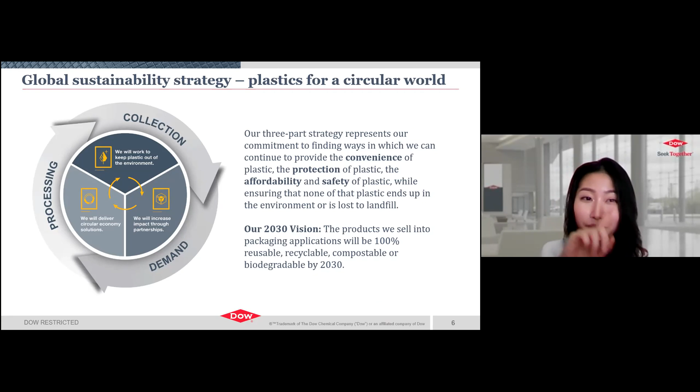our third phase of sustainability targets, we have announced our 2030 vision. The products we sell into packaging applications will be 100% reusable, recyclable, compostable, or biodegradable by 2030. This may sound familiar to some of you, as similar to what many brand owners have already pledged.

Led by the Ellen MacArthur Foundation in collaboration with the UN Environment Program, the global commitment has united more than 500 organizations behind a common vision of a circular economy for plastics. Driven by the goal of tackling plastic pollution at its source, companies representing 20% of all plastic packaging produced globally have committed to ambitious 2025 targets to help realize that common vision.

This global commitment to increase recycled content in their packaging to an average of 22% by 2025 amounts to a demand of 5 million tons of recycled plastics. In order to satisfy this demand for PCR, Dow has been investing heavily in not just R&D, but also in our assets to allow for this pivot to green plastics.

Unpacking the commitment from the brand owners, there are three key components to the pledge that need to be fulfilled by 2025. The first is the inclusion of PCR in the packaging. The second is enabling the new packaging to be recyclable. And the third is non-fossil fuel-based plastics for the new packaging.

Dow is delivering solutions to fulfill the recycle component with our 25% and above PCR in applications like collation shrink film and other protective packaging. With our design for recyclability category of solutions, like monomaterial PE pouches, we are fulfilling the recyclable component of the pledge. Lastly, to reduce our dependence on fossil fuel and move to renewable materials, we have introduced our 100% bio-based resin made from non-food competing sources.

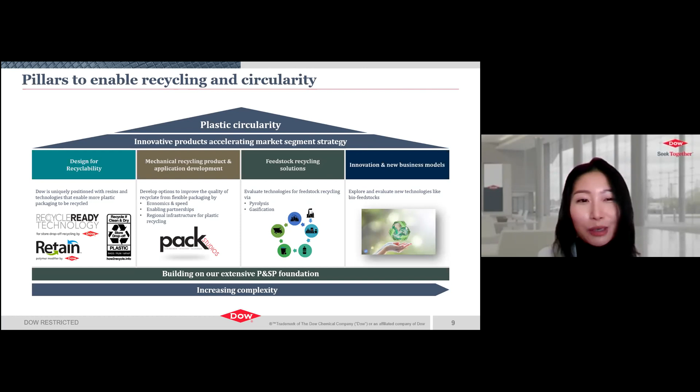In the pillar of mechanical recycling, Dow has been working with the whole value chain, from recyclers, equipment manufacturers, brand owners, converters, retailers, for product and application development, to ensure that our PCR not only fulfills the performance requirements of the brand owners, but is on par with virgin resins, to enable higher loading of PCR in all of the key applications we have targeted.

Now, I shall pass the time on to Daniel, who will take you through the details of our PCR solution.

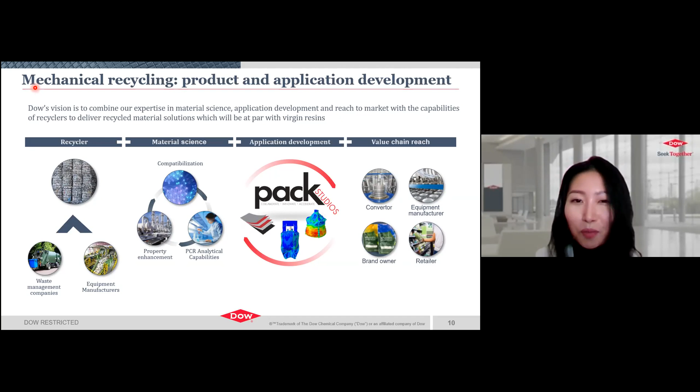Pack Studio is a place where Dow customers' innovative ideas or packaging needs get addressed through collaborations. Dow customers value the lab capabilities and also the expertise that help them solve packaging problems and develop better solutions.

The resin technologies from Dow suitable for mechanical recycling can be divided into 3 types. The high performance resins are the enhancers to boost the properties, compatibilizers to harmonize different polymers, and impact modifiers to increase the impact as the name suggests. All 3 can actually be used with post-industrial waste as well as post-consumer waste.

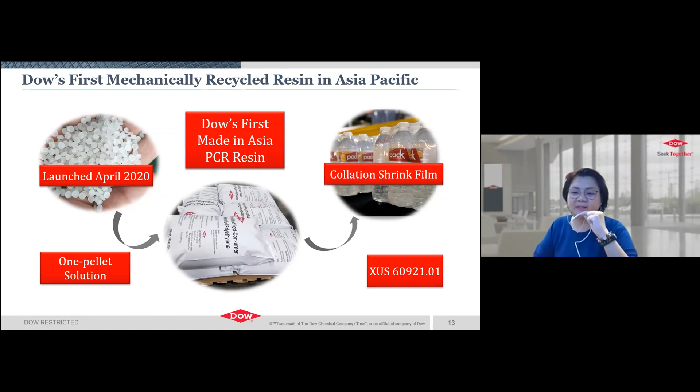So in April 2020, we launched the first made-in-Asia PCR resin into the market, named XUS 60921.01. It's a one-pellet solution, containing 40% PCR, targeting collation shrink application. The launch made headlines on main social media and also appeared in various industry-leading magazines. In November 2020, it won a Sustainability Award in China.

Dow's PCR resin is a formulated one-pellet resin with 40% PCR content, made with post-consumer waste collected within Asia and manufactured in China. The resin is designed to be a direct drop-in for the majority of collation shrink film in the market without modification of the current film structure. Depending on the film layer ratio, the PCR resin can deliver between 13 to 24% PCR. Since its launch in Asia, we have received strong interest from brand owners.

The main reason collation shrink is chosen as the first target application for our PCR resin is the market needs. Driven by modern lifestyle and also the recent pandemic, consumers are buying groceries online, and beverages are one of the most frequently ordered and delivered items. Despite Asia being the fastest growing region for e-commerce, the infrastructure makes it challenging for goods to move across intact. The collation shrink film holding the beverages together serves more than providing convenience, but is an important protection layer against physical abuse.

In recent years, consumers are paying more attention to sustainability. When consumers discard the collation shrink film, the waste itself has a visual impact on consumers, and thus a call for greener packaging.

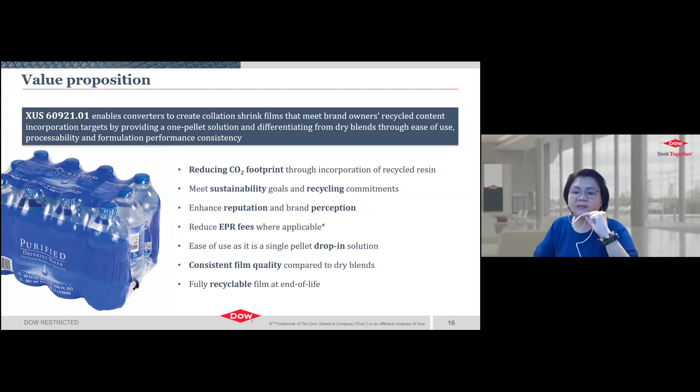Here's a recap of the benefits of Dow's formulated PCR resin. The PCR resin keeps waste away from landfill, oceans, and the environment through mechanical recycling. Technology advancement today allows us to produce consistent quality and high performance PCR resin, which in turn reduces the dependency on virgin plastics from fossil fuels. The PCR resin delivers lower carbon footprints, energy savings, and socioeconomic benefits in the value chain.

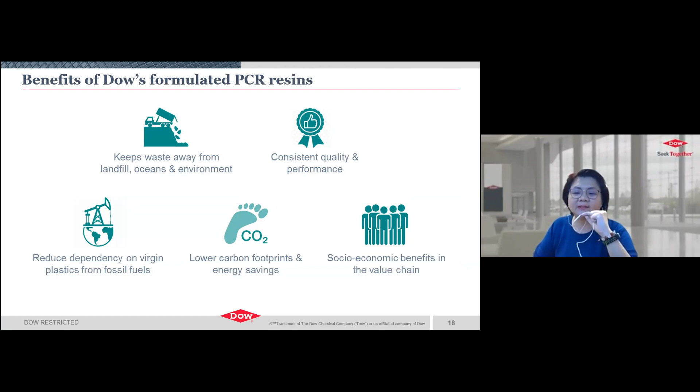Up next, we have a customer testimony from Thai Packaging, one of the leaders in protective packaging in Thailand, to share their experience of working with Dow on our PCR solution and how the market has responded to their sustainable collation shrink film.

Are you okay? Are you playing a video for us or no? Yes. Okay, sorry, okay. You can hear that, right?

Hello everyone, please allow me to introduce myself. My name is Thanadet Rabgopchai, or you can call me Trong. I am the Assistant Managing Director of Thai Packaging Manufacturer. I'm more than happy to be your interviewing guest today.

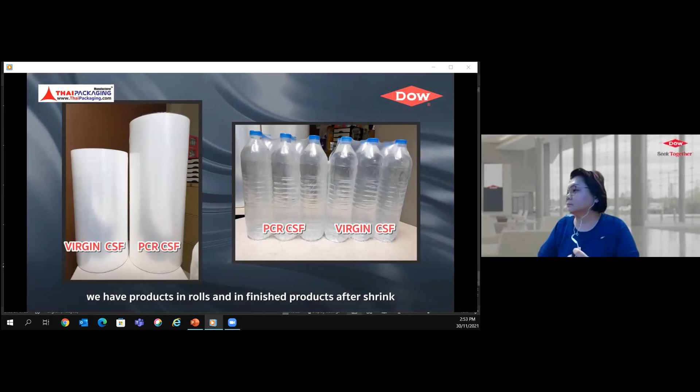Here are some examples of PCR collation shrink film that we are currently supplying to our customers. In front of you right now, we have product in rolls and in finished products after shrink. What you can see is that we can develop the PCR resin into film which has the same physical properties, just like using virgin resins.

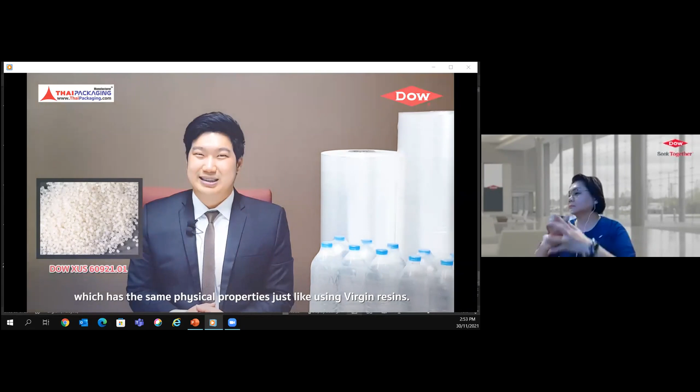Our sustainability goal is to be part of Thai communities, providing cutting-edge innovation for modern living flexible packaging, with our concept of 3 SAW 1 RAW strategies. The first SAW, develop quality products and services together with innovation alongside our customers. The second SAW, dedicate and share passion with our stakeholders, letting them be part of our family, Thai Packaging Family, Happy and Smart. The third SAW, deliver the IPOS standardized system to our supply chain to reduce mistakes in every process from beginning to end.

And the last, RAW, environment comes first. As a packaging producer, we never stop developing environmentally friendly products, and starting the circular economy in Thailand is our ultimate goal.

Dow Chemical and Thai Packaging have been good partners for a while. We share the same chemistry of business purpose, talking on the same page, driving innovation of packaging, pushing forward the circular economy. Dow is well known and has a high standard of profession, capable and more than enough to supply our needs.

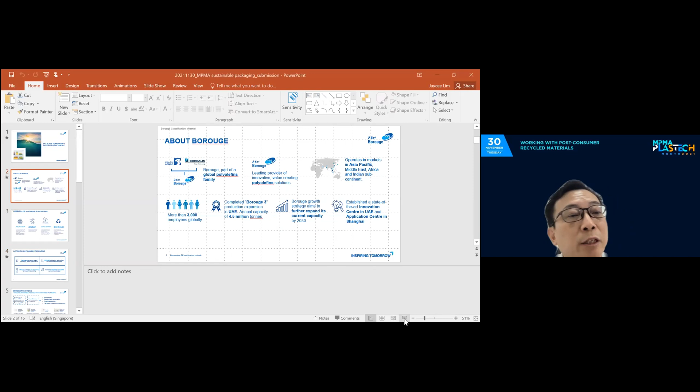So JC, you may have the floor. Hi, thank you for the introduction, Mr. Chase. So yes, I'm here to show and share with you how Borouge enables tomorrow's packaging solutions. But before I do that, I will first give a quick introduction to Borouge for those of you that's not familiar with us.

So Borouge, we are a leading provider of innovative value-creating PP and PE solutions across various markets in Asia Pacific, in China, Southeast Asia, ANZ, Middle East, Africa, and the Indian subcontinent. We are part of a global polyolefins family and are owned by the Abu Dhabi National Oil Company and Borealis, which is headquartered in Vienna.

We have the world's largest integrated polyolefin complexes, and we have the ambition to further expand our current capacity by 2030. We have more than 3,000 employees globally. And to support this growth, we have established a state-of-the-art innovation center and packaging center of excellence in the UAE, and also an application center in Shanghai.

Today's webinar focuses on recycling and the recycling solutions that are available in the value chain to support and drive recyclability. What I'm sharing today will also touch on those solutions. But before I get down to that, I would first like to take a holistic view on packaging sustainability. And from that angle, we see sustainability in packaging as a combination of the following four main elements.

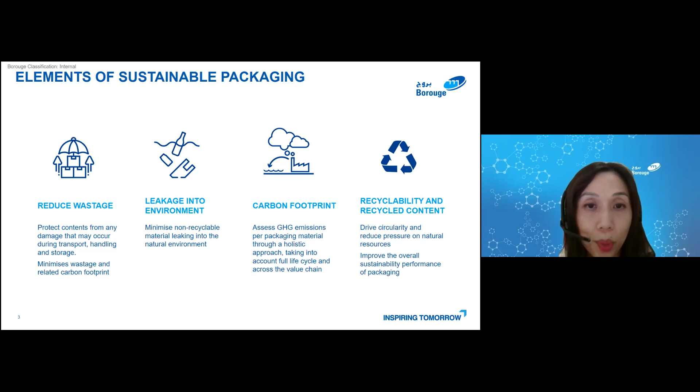With this understanding of packaging sustainability, I will next share what actions we take to drive sustainable packaging solutions.

First, to provide solutions designed for reusable applications, hence reducing unnecessary use of packaging. We also enable our customers and value chain partners to achieve lightweighting and down gauging, using packaging at an optimal level. Our solutions also drive efficient packaging by increasing productivity, driving energy savings, and reducing transportation footprint. We also promote solutions and concepts that enable fully recyclable package designs for greater recyclability, and we drive circularity, providing customers with solutions that allow increased renewable and recycled content in packaging.

Now we'll look at the ways our technologies and products enable us to act on these elements.

First, we look at how material innovation can help achieve higher efficiency and sustainability during production for rigid packaging. At Borouge, we make this happen through a combination of Borstar PP polymerization and Borstar Nucleation Technology, or BNT, which allows the product to have increased stiffness without negatively affecting impact, enabling lower wall thickness and down gauging of the end product. We also allow for the reduction of energy consumption through the possibility of reducing the extruder temperature.

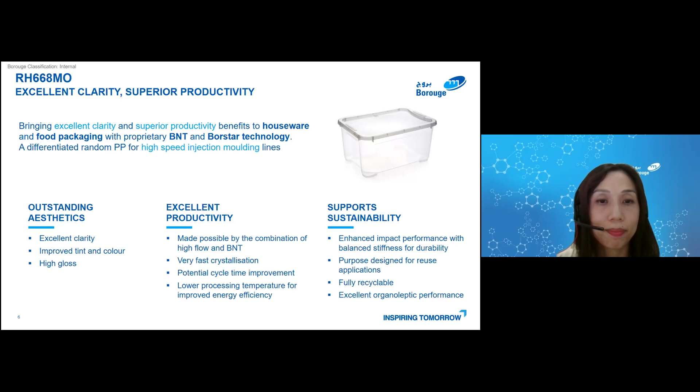Next, we look at how to enable greater recyclability in flexible packaging through design, because thoughtful design can play a critical role toward achieving circularity. The way a package is designed provides the prerequisites for more efficient recyclability. In flexible packaging, attention has been on the drive toward monomaterial laminates, and there are webinar segments in this MPMA Plastech Month focused on monomaterial developments. Here are some design-for-recyclability categories of solutions based on Borouge's value proposition and differentiated products.

If requiring oxygen barrier performance, we have the metallized full PE film solutions, and the presence of metallized component is acceptable for recycling as the typical content is also less than 5%. There is also the full PE lami tube for applications like toothpaste, where differentiated Borouge high stiffness FB5600 replaces aluminum and provides excellent moisture barrier performance.

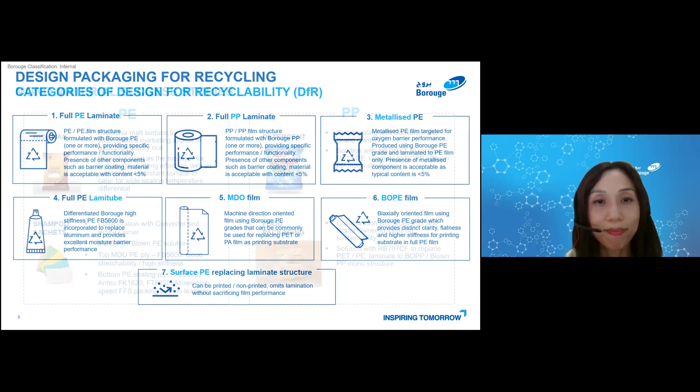And here in the next slide, we can see some success stories, both for PE and for PP. On the PE side, we have the rice bag featuring an exclusive matte surface for differentiated marketing appeal to pack high quality rice. Borouge Borstar is used as the top layer for high quality printing effect, as well as to provide heat resistant surface to cater for wide sealing temperature differential.

There is also shampoo sachets, which has been the target of major brand owners to convert to fully recyclable structures. Here we have an MDO blown film PE solution, which allows for high-speed form fill seal packing with no leakage. And on the right, on the PP side, we have our random material to convert PET and PE laminate to BOPP and blown PP monomaterial structure, with success cases in both detergent and food packaging.

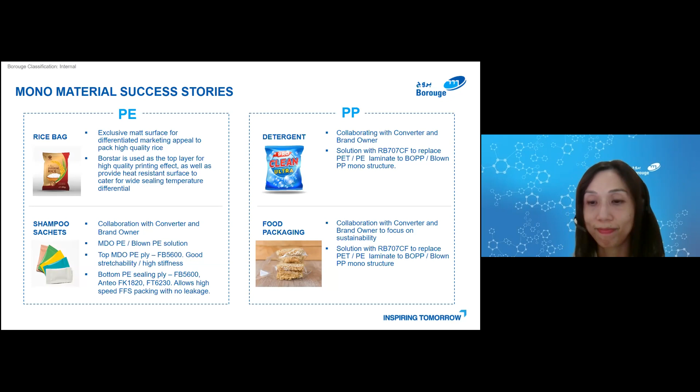And finally, I will share how we drive circularity with solutions that allow for increased recycled and renewable content in packaging.

On the renewable front, we have Bornewables. Bornewables is a new portfolio of circular polyolefin products that are produced with renewable feedstock derived entirely from waste and residue streams. These premium polyolefins offer the same material performance as virgin polyolefins, and they can be used for any number of applications in all industries, including food contact.

Using these innovative and more circular products will help enable our customers to meet their own sustainability targets while maintaining existing quality standards. The Bornewables are drop-in solutions. They have the same mechanical properties, product safety, and recyclability as virgin material.

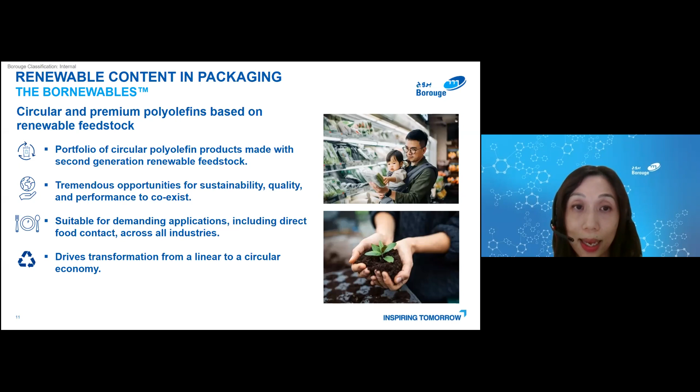When we talk about renewable feedstock, there are actually many different forms, and they are all biomass, which replaces fossil feedstock in the production of polyolefins. But there are actually multiple generations of renewable feedstock. The first generation are mainly oils derived from food crops. These crops are rich in carbohydrates and can be consumed by humans and animals. Some common examples would be corn, sugarcane, potato, rice, and so on.

Then we have the second generation feedstock, derived mainly from non-food crops and plants not suitable for animal or human consumption. For example, oil waste from food and vegetable oil production, wood residues, etc. Then there is also the Gen 3 feedstock, which is derived from specially engineered high energy crops such as algae.

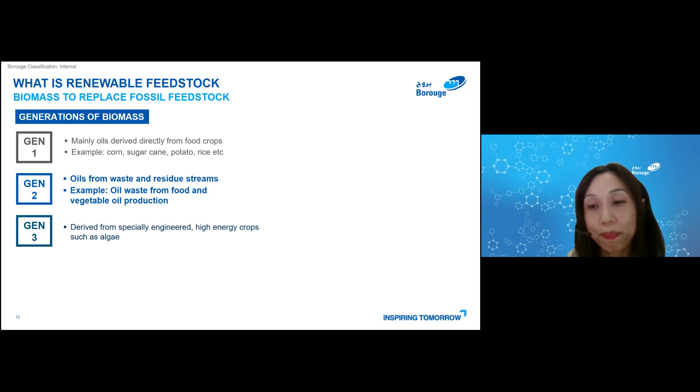The Bornewables use the Generation 2 feedstock, derived solely from waste and residue streams, such as vegetable oil production, oil waste, and residues from the timber industry or the food industry. This feedstock does not compete with food crops, giving a reduced carbon footprint to the end product and decoupling plastics from the use of fossil feedstock.

The renewable PP and PE solutions shown here can be used in a broad range of applications like rigid packaging, appliances, flexible packaging solutions, and there are also products for fiber and hygiene applications and other specialty areas like automotive, healthcare, and infrastructure. As mentioned earlier, these are drop-in solutions with the same mechanical properties, product safety, and recyclability as virgin material.

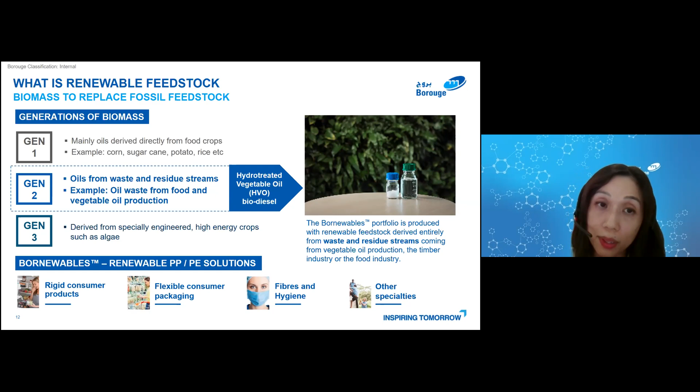In the next slide, we can take a look at one of our PE offerings. Here we have our PE recycled offer, LD-P1. This is a 926 density, 0.4 MFR material.

When it comes to recyclates, one of the key areas we test is the gel count of the material. As you can see from the data, the 100 to 300 micron gel level of LD-P1 is less than 5,000 per square meter, which is significantly better than a European reference, which has already been qualified by a major global brand owner for non-food packaging.

So global brand owners that have commercialized packaging with recycled content have also accepted that it wouldn't be realistic or practical to compare it with virgin level film aesthetics, and they are willing to adapt as long as package safety and performance is up to standard.

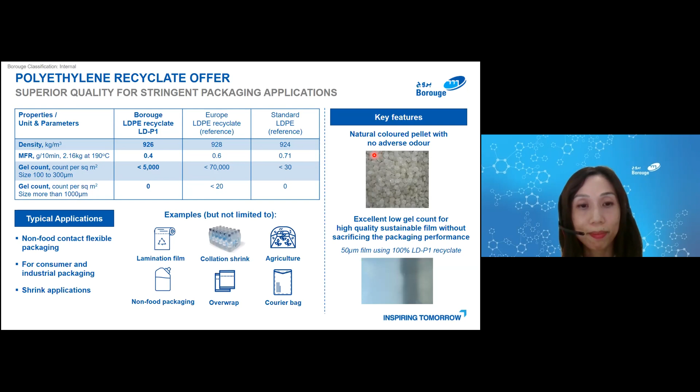And with this, it also brings us to the end of today's sharing of the 4 elements of sustainable packaging and the respective actions to drive the right solutions.

To sum up today's sharing, we believe that as an industry, we should all acknowledge the trade-off between the different sustainable packaging elements, and the lowest carbon impact material may not always have the highest recyclability or use of recycled content. It will be a multifaceted approach to act on packaging sustainability, addressing all the different elements, and there are multiple solutions to further the transformation to a more sustainable and circular economy.

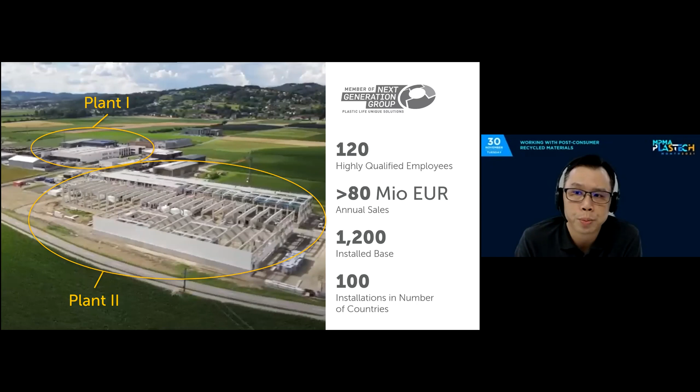Together with its 3 other subsidiaries strategically located around the globe, our presence ensures that our clients are well taken care of.

Ladies and gentlemen, I'm sure that you are well aware of the statistics on the amount of waste that's being used and disposed of, or the waste that's leaking into the ecosystem. Therefore, I shall not dwell on this topic too much, as we all already know that we are in a state of crisis. Let's now explore the range of solutions that we have at NGR, where we classify our waste in 3 categories.

The first being post-industrial recycling, post-consumer recycling, and PET improvement.

Each classification has its own unique solution. This may look rather complicated, but is definitely necessary, seeing that waste comes in varying shapes and sizes, bulk densities, layer structures, amount of prints, moisture, and contamination. The most critical factor is the customer's requirements and their expectations towards the recycled materials. However they would like to reuse the recycled pellets dictates the applied solution.

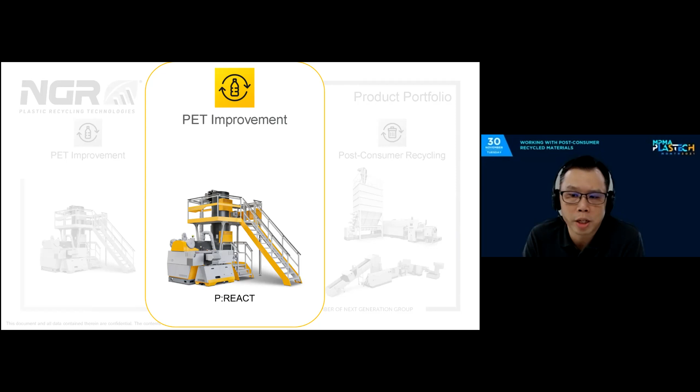And finally, the PET segment stands alone as a separate segment, as the waste feedstock could be derived from both post-industrial as well as post-consumer sources. It features an add-on decontamination process that integrates with the existing product portfolio to produce high quality, comparable to virgin grade, PET pellets that are food grade approved. Hence its applications are endless, as you will experience in the focus feature segment ahead.

With this range of products, I would like to put focus on 2 out of the 3 segments that we are offering. Let's start with post-consumer recycling.

Post-consumer recycling, or more commonly known as PCR, takes feedstock from waste that has been disposed of after consumption. Such waste must go through various washing and sorting processes to separate the non-plastics from the plastics and separate the individual plastic streams prior to the recycling process. NGR's solution starts after the washing and sorting process is completed, leaving fairly clean plastic flakes.

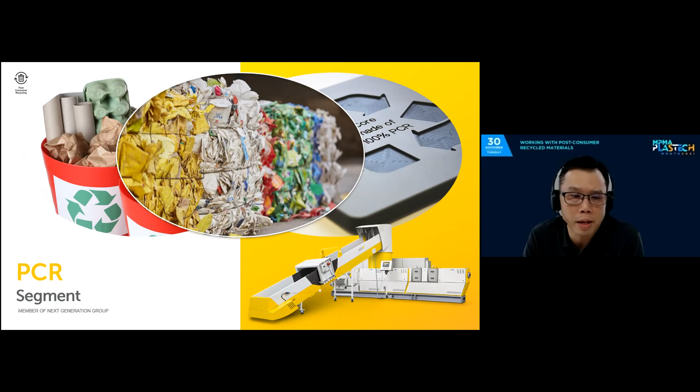Post-wash film could consist of various forms, but is generally already size-reduced as a result of the washing and sorting process. The waste coming from the washing line can be relatively moist, and this can be detrimental to the quality of the recycled pellets. To overcome this, a slightly different method of handling the waste is required.

The C:GRAN model in NGR's range is made specifically with post-consumer waste in mind, where a cutter-compactor-extruder combination preconditions the moist material sufficiently before recycling, resulting in a high quality pellet that can be used to manufacture other plastic products.

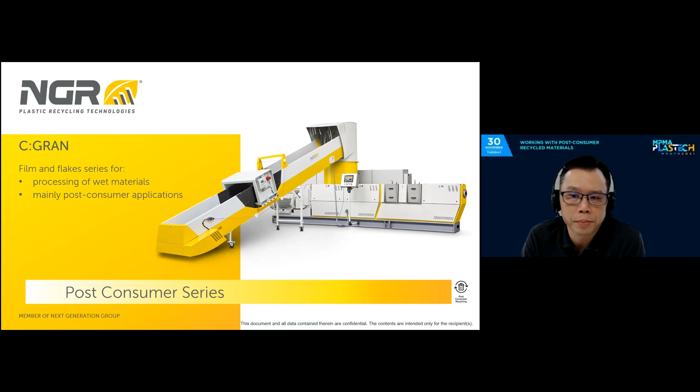Plastic waste is chopped by rotating knives in a proven concept known as a cutter compactor. Specially arranged internal deflectors provide additional compacting of the material. This frictional heat densifies the plastic and force-feeds it into the extruder screw. The customized extruder geometry guarantees efficient use of the preheated and compressed material from the cutter compactor. The result is a maximum output with a high degree of homogenization while minimizing energy consumption.

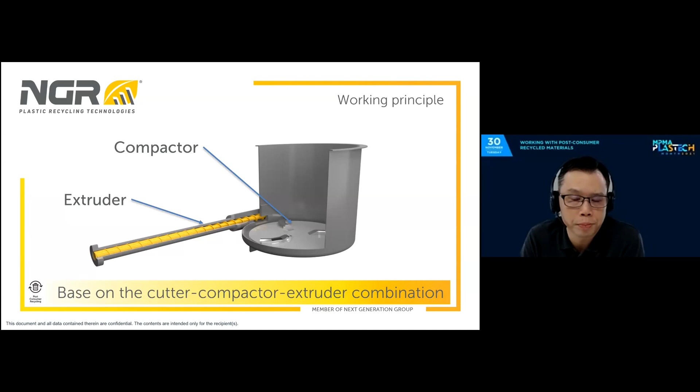A great example of how NGR puts collected waste back into the product is featured here by one of our clients, Silvex. Here's a short video.

The future is the result of our choices, and we all want to choose a more sustainable future. Every day we dispose of tons of plastic waste. What happens from here onwards is decisive in the increase or reduction of plastic pollution.

Often this waste is sent to countries without the capacity to manage or process it, and so we are exporting a problem that is ours elsewhere, causing serious environmental problems.

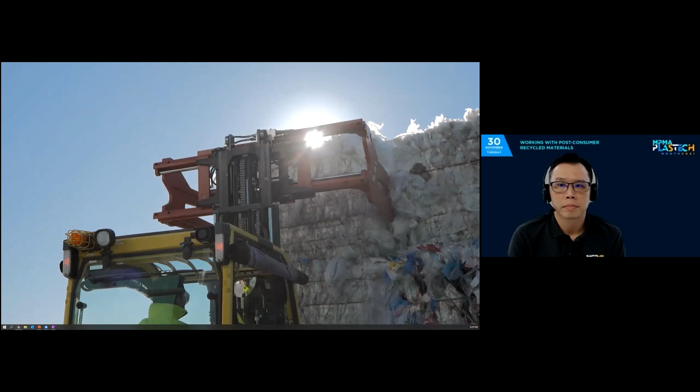Can we do it differently? Can we transform these discarded materials into new products? The real problem with plastic is not the material, but what we do with it after using it.

In nature, nothing is lost. Everything is transformed, just like plastic.

At Silvex, we choose to do something different. Silvex's new recycling unit allows for the treatment of plastics at the end of their life, giving these materials a second life and making them circular.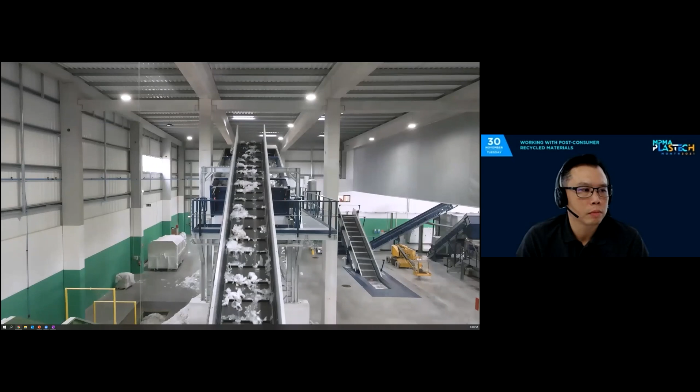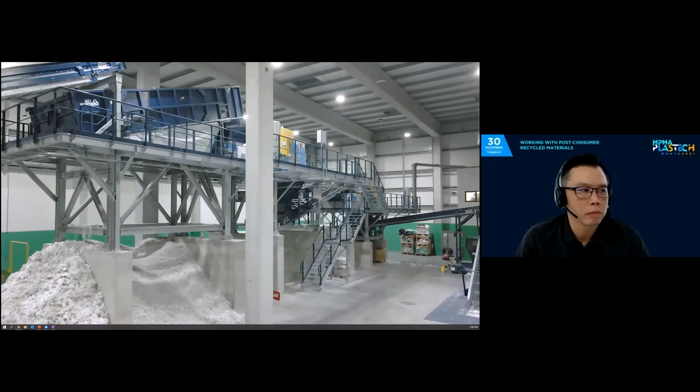Tons of plastic waste from the most diverse customers arrive at this unit every single day. This material is sorted according to its origin, which will be transformed into new raw material, ensuring that these plastics will not pollute the environment.

Sorted by polymer type and by color, using highly technologically sophisticated equipment, non-plastic materials are removed, allowing for above-average quality levels in the recycled material obtained.

This step is essential for replacing virgin polymer with recycled polymer. We are making plastic from the plastic that already exists.

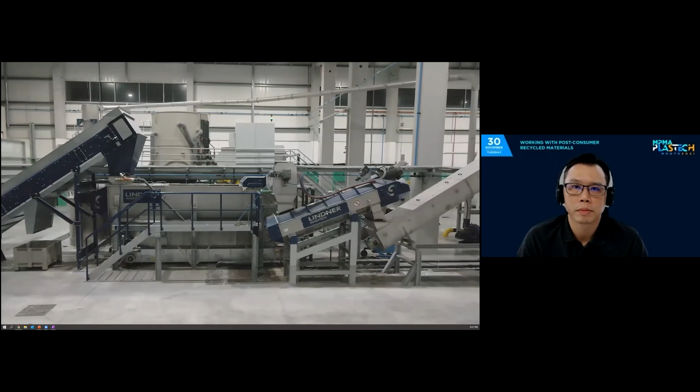After the first sorting process, the material is yet again sorted by optical systems by plastic type. Then it goes to the washing process where materials such as paper from labels and glue are removed.

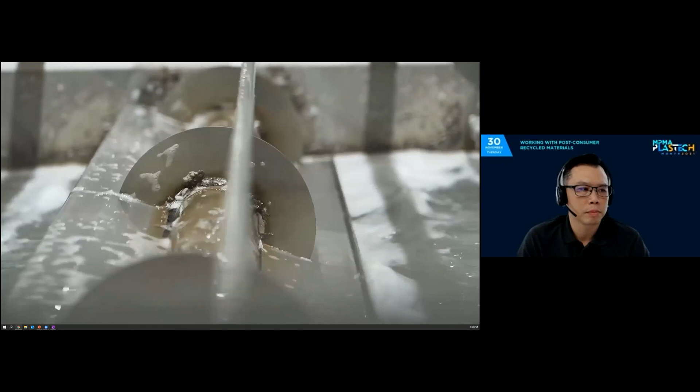All of this is managed and controlled by computerized systems and connected to a state-of-the-art wastewater treatment plant that allows for efficient environmental management.

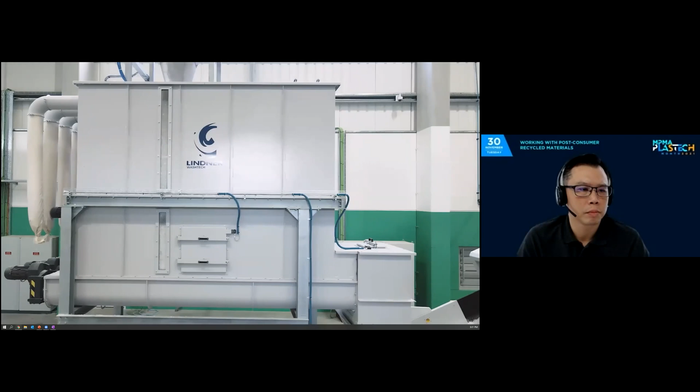After these treatments, the plastic is ready to be melted in this last step that we call extrusion, which transforms the plastic into new raw material in the form of small granules.

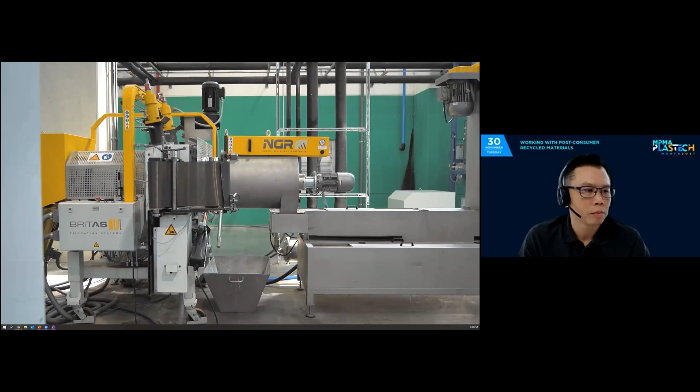The entire recycling process at Silvex is led by strict quality control procedures so as to guarantee the highest safety possible and a wide applicability of recycled polymer in products.

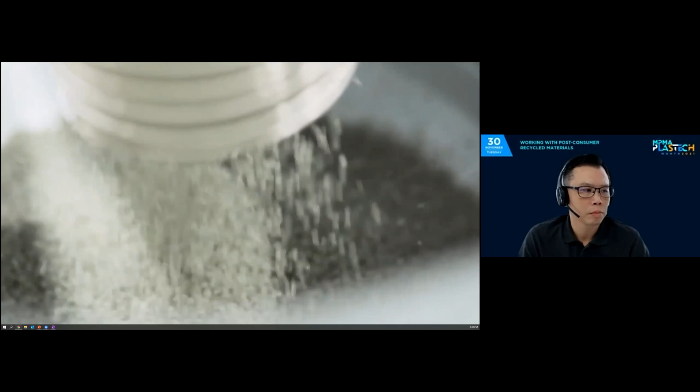Bagged, these granules are then transported to another plant unit where they will be used as raw material for new products. At Silvex, we transform plastic that used to be considered as waste into new plastic and show that it is possible to do things differently.

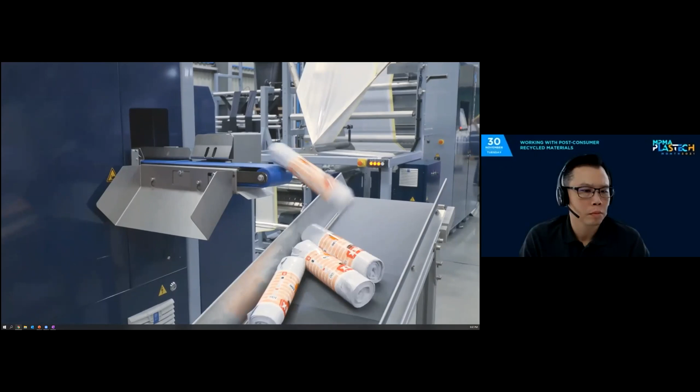In an economy that is expected to become more and more circular, increasing the efficiency of plastic's life cycle and ensuring a high incorporation of recycled materials in the products we consume is the key to a more sustainable future.

The material that had once reached the end of its lifespan is now valued and transformed into Silvex products, thus avoiding the use of new resources and contributing to the reduction of environmental pollution.

In nature, nothing is lost. Everything is transformed, just like plastic.

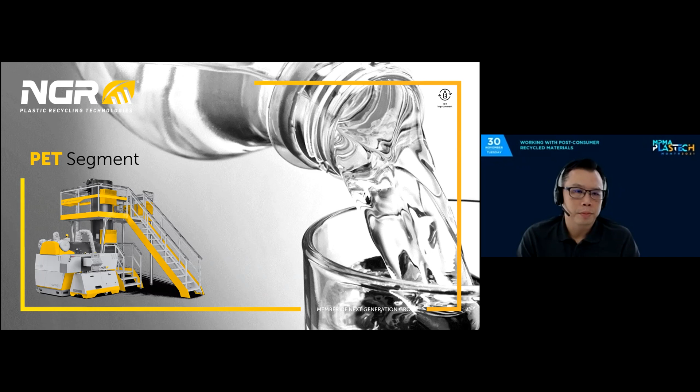This complete recycling process consists of three modular steps, which can be interchanged depending on its input material specifications and the output requirements of the client.

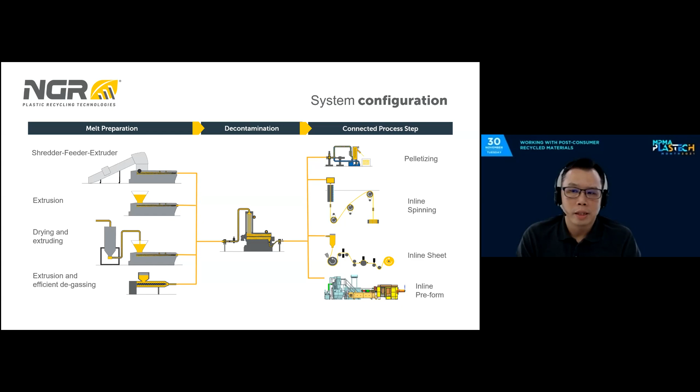As you may be aware, PET is not only in beverage bottles, but also in many other items such as textiles and fabric, food trays and containers.

Depending on the type of input material and its quality, different melt preparation technologies could be applied here.

As an example, textile waste could be processed with NGR's post-industrial series shredder feeder extruder combination to provide melt that will subsequently be piped into NGR's P-React liquid state polycondensation system for decontamination and IV lift.

The center is the P-React, which runs on the liquid state polycondensation process, or LSP for short.

This process decontaminates the liquid PET and provides a substantial lift in the viscosity of the PET within a very short period of time. In combination with online viscosity measurement tools, the process can be controlled to the precise viscosity the user requires for the application.

This results in a stable uplift of the viscosity where the PET melt is certified FDA approved.

This means that the melt coming out from the P-React system can be used to produce food contact products such as bottles and trays.

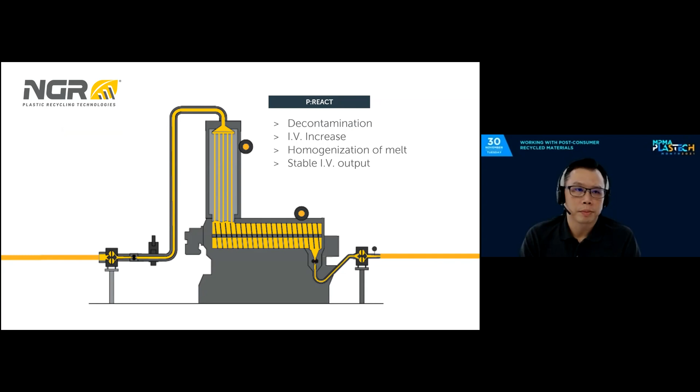Since the PET melt is decontaminated and the viscosity meets the client's target, the output devices can vary depending on the application. To provide full flexibility to the client, pellets can be produced to store and await further processing, or they could be made directly into an end product, such as filament yarn for textile production, or even PET sheet.

That sheet could later be made into food trays or containers. The conditioned melt can also be fed directly into a preform injection molding machine, which could later become beverage bottles. The benefits of producing a product directly from the conditioned melt are substantial. For one, you save on the capital investment cost of an extruder required to remelt the pellets again. The second benefit is the potential energy savings of producing a product directly from conditioned melt.

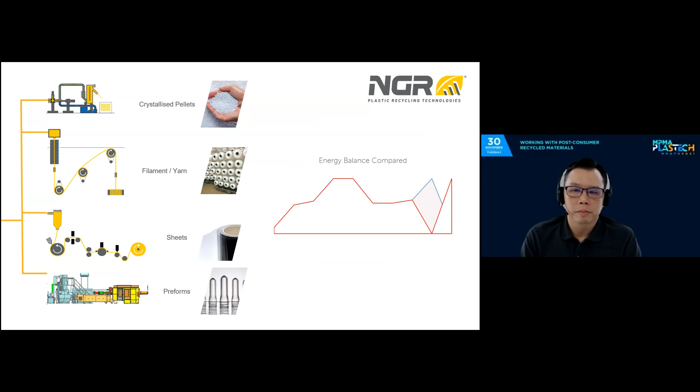As you can see in the first energy balance graph, which shows the melt being made into a pellet, the second graph shows the trend of the material being made directly into a product. Pay attention to the back end of the curve where you will see the difference. If I overlap the graphs, you will see clearly the energy saved from producing a product directly. This potential energy savings can only contribute to your bottom line.

Decontamination properties of the LSP process of the P-React have been tested and approved by the US FDA as well as the EFSA. Brand owners around the globe have also given their seal of approval for our process to be used to process post-consumer recycled PET bottles into beverage bottles again.

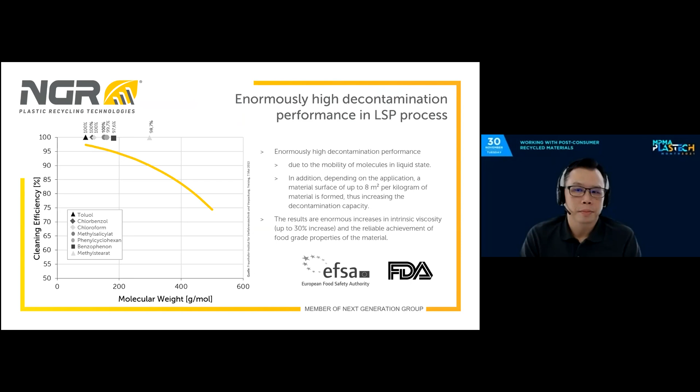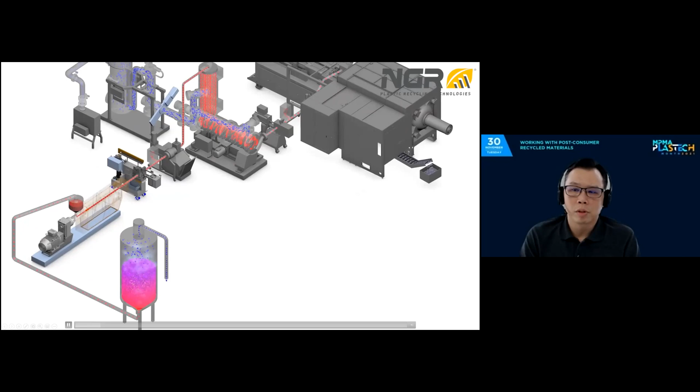As a short illustration, I would like to show you a short animation on how the process works. This is a process in which post-wash PET bottle flakes are made directly into preforms. Washed PET bottle flakes are first pre-dried to remove any excess moisture, then melted in the extruder before being filtered by the first melt filter.

The melt enters the P-React system for decontamination and viscosity lift. The volatiles are then extracted and filtered via a condensation system. The decontaminated melt goes through a final melt filtration before entering the injection molding machine, which in this case produces preforms that could then be made into beverage bottles.

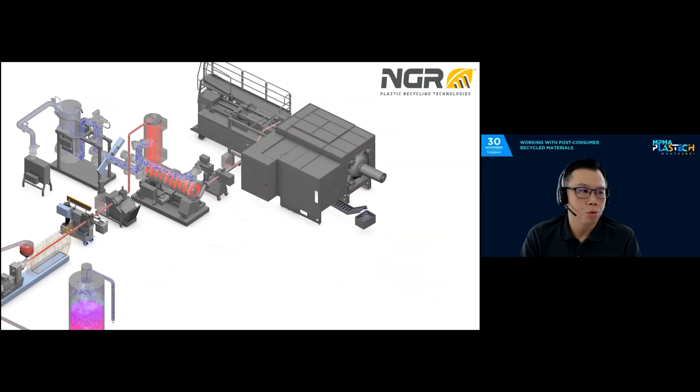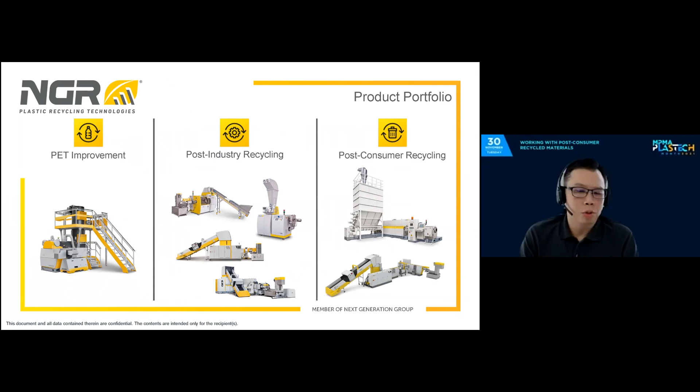At NGR, we have the ability to cooperate with the largest clients with a multitude of flexibility in our solutions. We encourage interested clients to send us your waste to be tested in our lab facility in NGR, Austria. We have all our equipment on display and process customers' materials daily so we can accurately find the best solutions for your everyday needs.

I personally encourage you to come talk to us over a cup of coffee and let us know your recycling aspirations, and see how we could help you. A cup of coffee doesn't hurt, but not recycling hurts Mother Nature more. And that is the end of my presentation. I hope to see you again soon. Thank you very much.

Thank you, Raymond. Thank you. Raymond, a cup of coffee doesn't only not hurt, it helps. Yes, I definitely need a cup of coffee to start the day every single day. Thank you very much for your presentation on PCR recycling technology and for sharing how your customers use NGR's solutions technology to recycle PCR into high-valued plastic products again. Thank you very much. Thank you, Mr. Chair, and thank you for your German-accented presentation—we feel like we are in Austria, at least virtually.

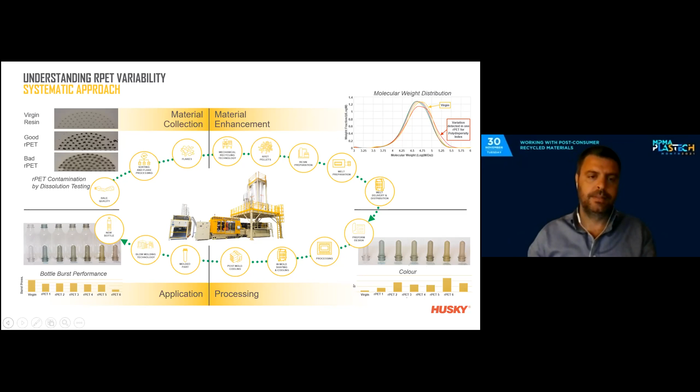So we have significant control over the process, but still we see that between material collection, material enhancement, processing, and the different applications, there is a significant source of variation to which we applied a systematic approach of understanding exactly how this variability can affect the quality of your finished good.

So the Husky suite of solutions to handle increased PCR content: from left to right, our multi-layer technology—I'll speak about that later, on how we can incorporate recycled material in a middle layer of a preform. We have our HPP5E technology, the rPET-ready system, the best foot forward to handle rPET applications. We also have a system to handle food grade flakes.

I won't spend a lot of time on food grade flakes because it's a material we rarely see in the market today. Then we have our recycled melt to preform. Raymond was presenting before the capability to link a decontamination and melt decontamination unit directly to the production of preform, and this we do with our recycled melt to preform technology.

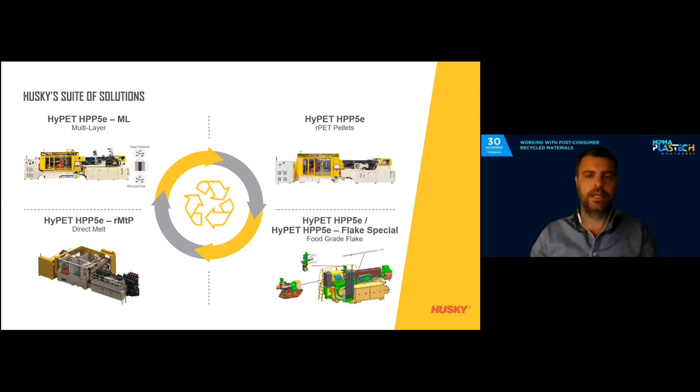So the rPET solution technology, our HPP5E, is our standard system, a standard solution with an integrated PET preform solution from pellet to preform. We have the dryer, the resin preparation, the melt preparation, and the molding and conditioning of the preform, all in one system, fully integrated and controlled—also with our extended experience in PET processing.

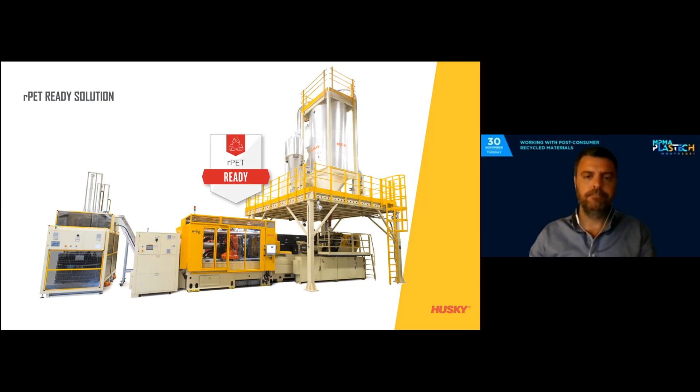As I said, the system is the best foot forward to handle rPET, but we cannot talk about one rPET—there are different types. There is very good quality rPET, but unfortunately there are also lower qualities. As I explained before, with the market as is and as it will be within the next 5 to 10 years, it will be difficult to source material, and it will tend to be lower quality. In this slide I try to summarize the differences and risks that come with this variability in material quality.

rPET normally requests a more gentle drying, so we need to make sure the drying system is adequate to dry rPET. We mix two materials, and this can lead to inhomogeneous melt properties. There's also increased cavity-to-cavity variability, and the possibility of dust creation in the mold vents.

Also, if the material quality is in reality low and we have a huge quantity of contaminations or black specks, those will pass through the system and may create defects on your preform. Then, of course, we need a system capable of handling process deviations that can affect part quality and consistency.

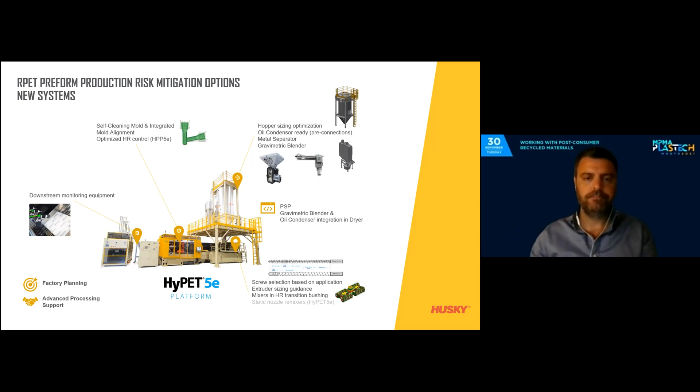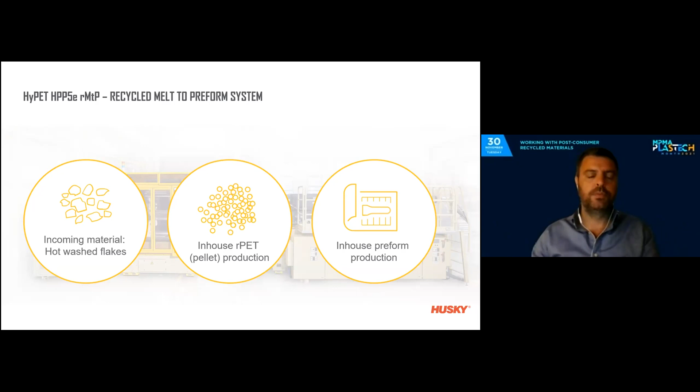I would like to mention the recycle melt to preform process. As we saw in the previous presentation, we can use incoming material, hot wash flakes, and produce in-house rPET pellets, then go into in-house preform production. Or we can link directly the hot wash flakes into in-house preform production by linking a melt decontamination unit like an NGR directly into a Husky system.

This machine you see here on the screen is our first system, today in production in Asia, where we have up to 30% energy savings connected directly to a melt decontamination unit. If you remember the graph from the previous presentation, that's where we see the savings from doing the direct link—we are not cooling, pelletizing, and then reheating again, we go directly into preform. Apart from the energy savings, there's also a very interesting advantage for circular economies: we give one less heat cycle to the material.

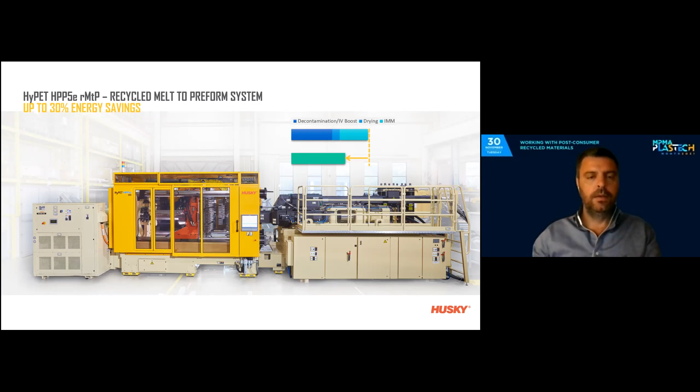Now I would like to talk a little bit about our multi-layer solutions. Since we launched our latest multi-layer technology in 2015, we still have tremendous market acceptance. We have sold 66 machines in 14 different countries for 10 different applications, ranging from CSD to dairy, and we'd also like to mention that 50% of our customers repeat an order.

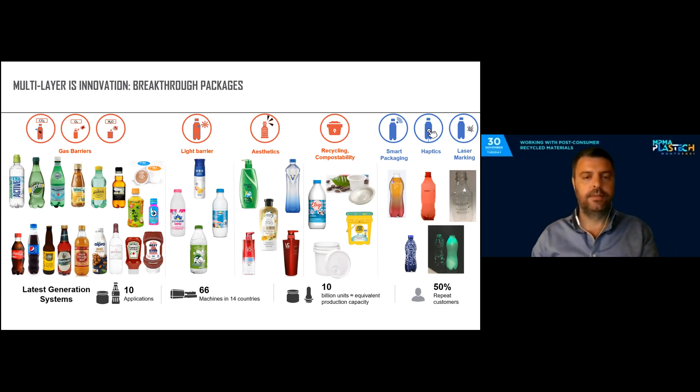When mentioning PET for those applications, we are talking about a whole new set of requirements for PET packages that can unlock growth in these different segments. For CSD, the technology supports the barrier of CO2 for small CSD packages. For juice and ketchup, the technology is used as a barrier to penetration of O2, and also as a barrier for light for milk applications. When we talk about beer, for example, it's all of those properties and capabilities combined.

We also see the aesthetic component—an example I will give on milk and dairy applications, and also on industrial pails for recyclability and sustainability.

A PET bottle is ideally suited to meet the dairy market trends. When we consider the different mega trends—e-commerce, health consciousness, differentiation, and at-home consumption—we should add sustainability to these mega trends. A PET milk bottle meets all of those mega trends and all of those requirements.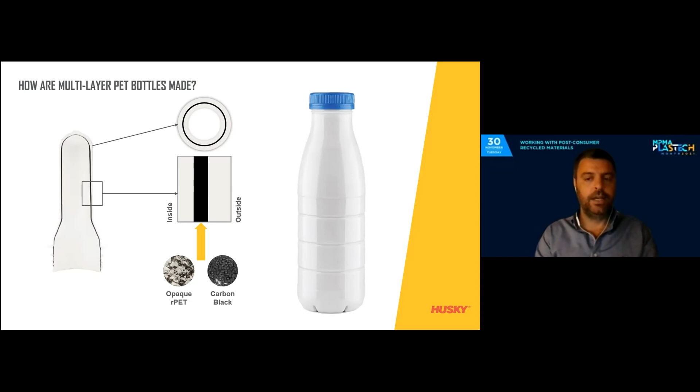That rPET is mixed with black colorant, so it can be any color, including opaque rPET from recycled bottles. This is how you see the difference between downcycling and the circular economy of PET—we can bring a PET dairy bottle back into a PET dairy bottle with the use of rPET, incorporating that material into the middle layer that you saw on the previous slide.

That example of circularity of multi-layer PET bottles is shown with three examples: Parmalat, Lactalis, Danone, and Granarolo, which is the second largest producer in Italy—all making the circularity of PET a reality.

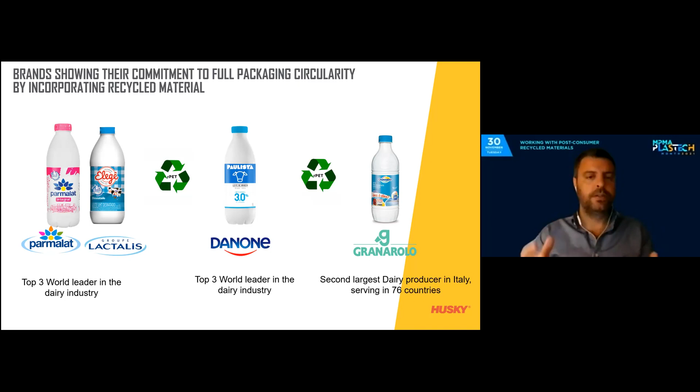I would also like to give you an example about a pail, more in the polyolefin area, where you see the use of recycled material in the middle layer, keeping the aesthetics and cleanliness challenges met by virgin material, while incorporating recycled material in the middle layer—reducing costs, but also lowering CO2 emissions and footprint by up to 35%.

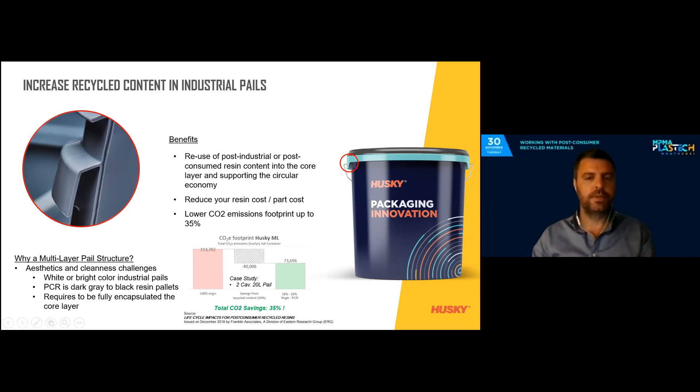Closing my presentation, going back to what I talked about earlier - having a complete system and a complete partner that is an experienced system manufacturer with responsive service and support, who can assist you with processing, monitoring, and preventive maintenance through our Advantage Plus Elite. We call it Connected Services - we are continuously connected to your system and support your production.

Finally, I would like to mention how we see circularity and the circular economy for rPET - it is actually about keeping the carbon in use. There are many innovations and active solutions today showing that.

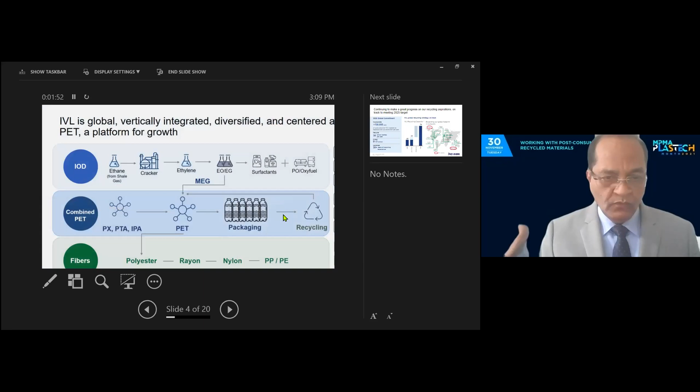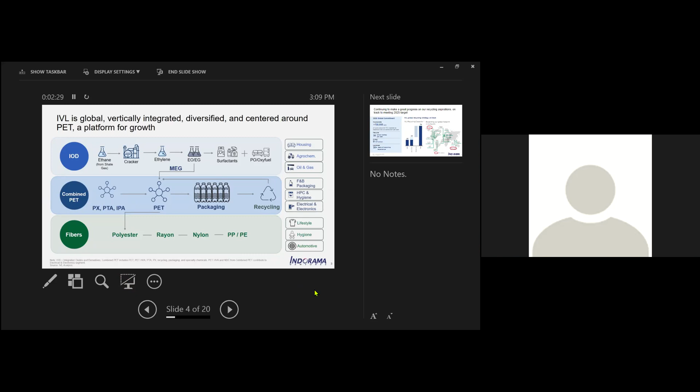As global recycling... Mr. Anivesh, could you make your screen full screen? You are in presentation mode, we are seeing your presentation mode - can you make it full screen please? Is it okay now? No, it's showing both the current and next screen. Somebody suggest how to do it please - Sujata? Never mind, I think we'll have to carry on. How do you make it full screen in presentation mode? He cannot use presentation mode, he just needs to view mode. Okay, now it's better, now it's okay, nice, yes, very good. Thank you very much.

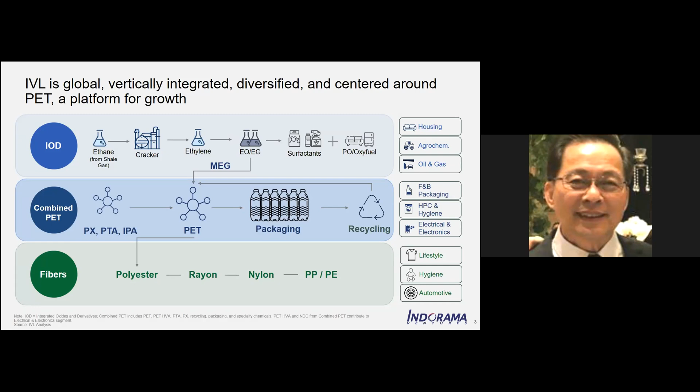Sorry for that. So Indorama has built a vertically integrated and diverse business centered around PET. In 2010, we were only a PET commodity company. Gradually but systematically, we have diversified. This included backward integration into PTA, which is a raw material for PET, and forward integration into packaging, where we still need to do a lot, but we are converting PET into bottles. 10 years ago, we also started building our PET recycling business. We are building a circular ecosystem for PET, as the world needs, since PET is the only 100% recyclable plastic.

Our fibers business started with polyester. Today, we serve consumers in lifestyle, hygiene, and mobility through polyester and other fibers. The third pillar of our business, Integrated Oxide and Derivatives, or IOD, allows us to backward integrate and secure MEG supplies, which again is a raw material for the production of PET. As you can see, our growth is intentional, building off our scale in PET at our core, but most importantly, our growth has sustainability running through it.

Government and industry recognize the value of PET not just from an economical view, but also from a holistic sustainability standpoint. From 2011 to today, Indorama Ventures has recycled 63 billion PET soft drink and water bottles. But we want to go further. By 2025, we have committed to recycle 750,000 metric tons of PET baled bottles.

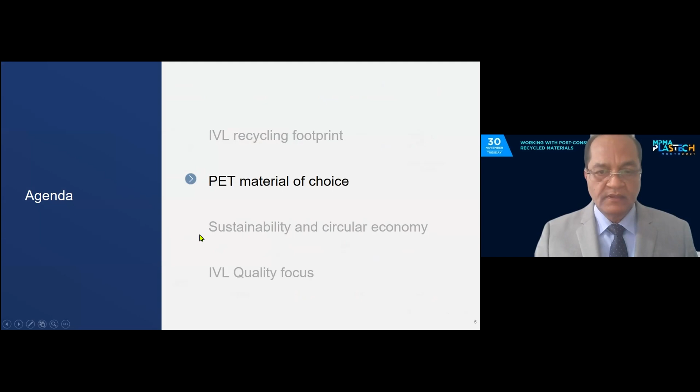We're investing $1.5 billion to increase our recycling capacity by 700%. These assets will join a family of recycling facilities across Europe, North America, and Southeast Asia. Our commitment remained steadfast through the uncertainty and challenges of the global pandemic.

Another issue is the misperception that all plastics are the same. If consumers don't know that PET bottles are fully recyclable, or switch to packaging alternatives that have a higher carbon footprint than PET, we will lose out. There's also an undue focus on 100% recyclable PET bottles. All plastics are not the same. Some are more recyclable than others. Scapegoating individual polymers ignores the bigger challenge.

PET bottles have clear design-for-recycling specifications and are widely collected and recycled into new bottles. Because of this, PET is the most recycled plastic packaging in the world, with an active secondary market trading bales of collected post-consumer bottles right now. Treating all plastics the same regardless of their recyclability is as much greenwashing as claiming your packaging is recyclable when it is not. This is because it denies the honest truth that, unlike a lot of plastics, PET is recycled in practice and at scale.

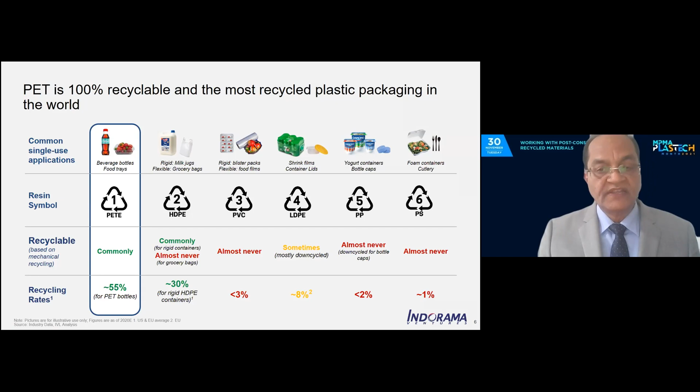If we continue to treat all plastics the same, we miss a huge opportunity. PET bottles are more than just recyclable—they are light and shatterproof. As a result, they use a lot less energy to make and transport compared to alternate package materials, meaning they have a much lower carbon footprint.

In fact, research from Imperial College London shows replacing PET with alternatives would increase the volume of waste, increase emissions, and increase energy use. A UN environmental program report highlighted that for the same amount of beverage product, using aluminum or glass instead of PET increases the global warming potential of the packaging. The science is clear: using and recycling PET beverage packaging will have a positive emission impact, decreasing greenhouse gas emissions.

Tackling climate change, reducing greenhouse gas emissions, and achieving carbon neutrality are not our only goals. Better waste management is top of everyday people's agenda too. Glass bottles and aluminum cans do have high recycling rates. Collection rates for PET bottles are not good enough. A lot needs to be done further.

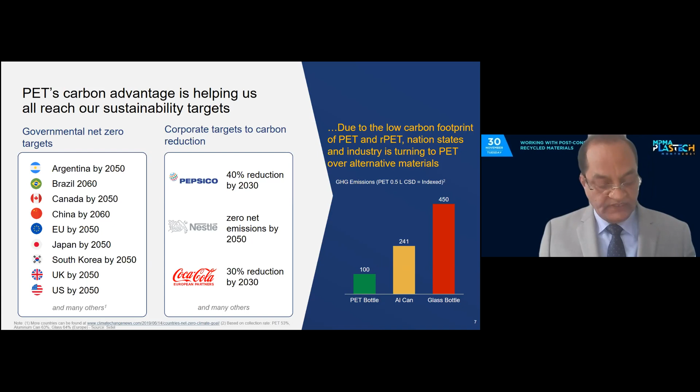Recycling is critical to our sustainable future as it delivers fewer greenhouse gases and less waste. IVL believes that the recycling properties of PET will drive growth in our sector. The reasons for this are as clear as the bottles themselves. First, consumers want sustainable and recyclable packaging. PET bottles are widely collected and can be recycled into new bottles or textiles. Many governments plan to collect 90% of post-consumer PET bottles, and global brands have targets to increase recycled content in beverage packaging.

This social, political, and commercial focus on recyclability creates an opportunity to enlarge our recycling investments and create a positive environmental impact. Brands are including more and more recycled content in their packaging to meet consumer demands. Global names like Coca-Cola, Suntory, PepsiCo, Unilever, Danone, and Nestle have all made ambitious commitments to include up to 100% recycled plastics in their packaging.

According to the Climate Bonds Initiative, investors with $45 trillion of assets under management have made public commitments to climate and responsible investment. In the future, sustainable businesses will be the investment of choice for mainstream investment opportunities.